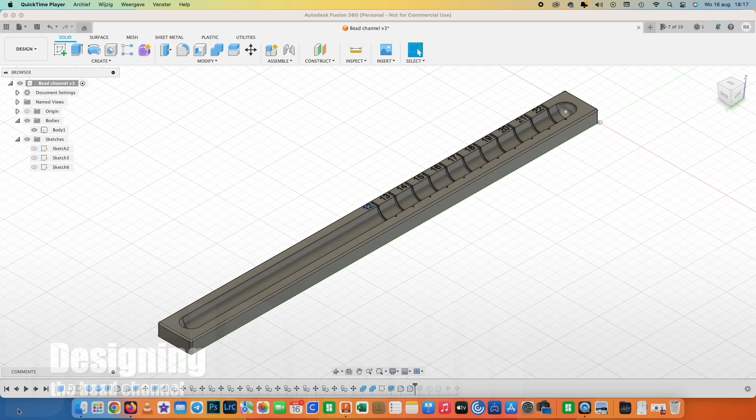After designing the bead channel, the grey one I printed myself, and the black one is from nylon from PCBWay. The numbers are really crisp, it's much sturdier. It's a little warped, but the quality is much better than what I printed myself.

Yes, I know this is something different than soldering electronics and stuff like that, but during summer holiday I decided that everybody needs a bead bracelet, so that's why this video is here.

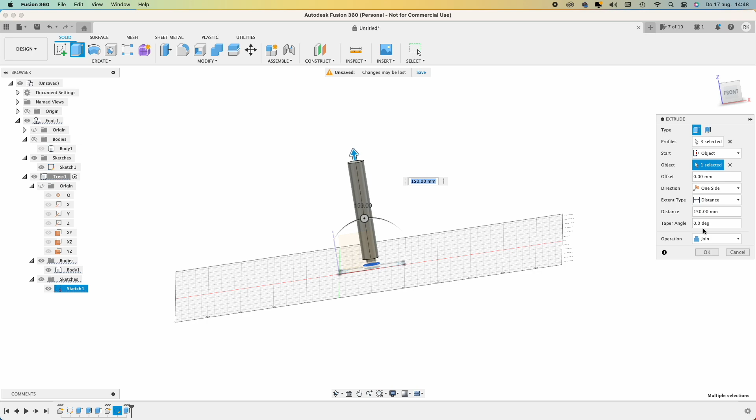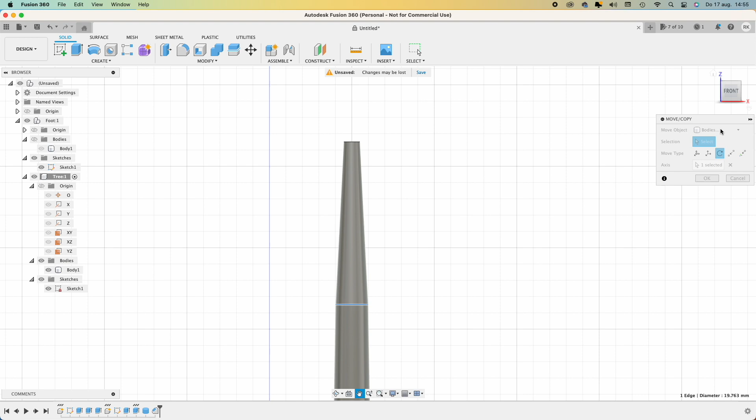I also use this tree as a learning curve, and you can see me struggling how to get the branches the right way. It took me a while to figure out. I can use sketches and some different tools in Fusion 360 to get it how I want it.

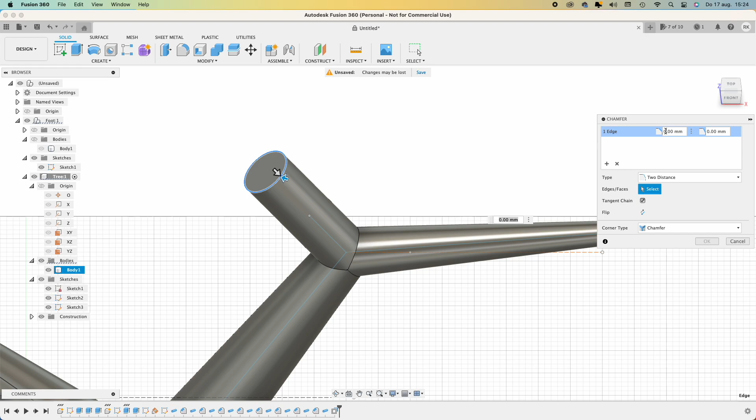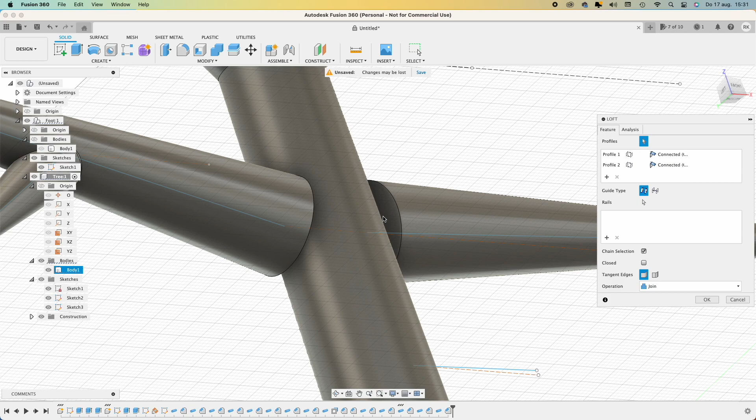Next challenge was to close the gaps on the branches. I used loft to do that, but that did not work on the stem. I had to create a different solution for that.

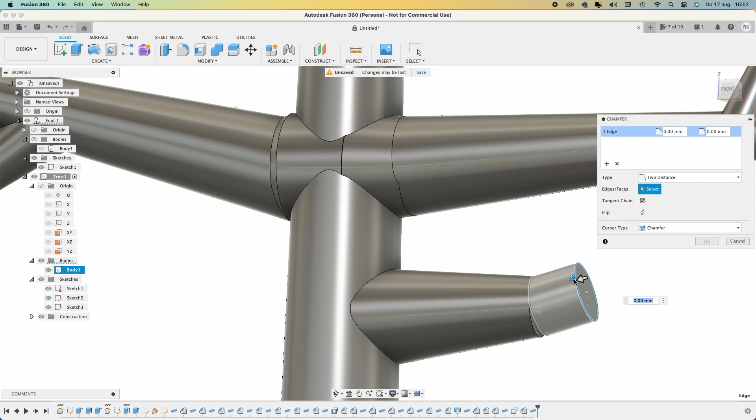After the design, I rendered them in Fusion 360 and they look really beautiful. So I put PCBWay to the challenge, uploaded my designs, and let's see how they turn out.

A few moments later.

They really know how to package stuff, make sure nothing breaks in transport. Oh nice, they added the goodie bag.

The base looks really good. It's not sanded overall, there's a few places that's not even sanded, but I'm gonna use this material for another project again.